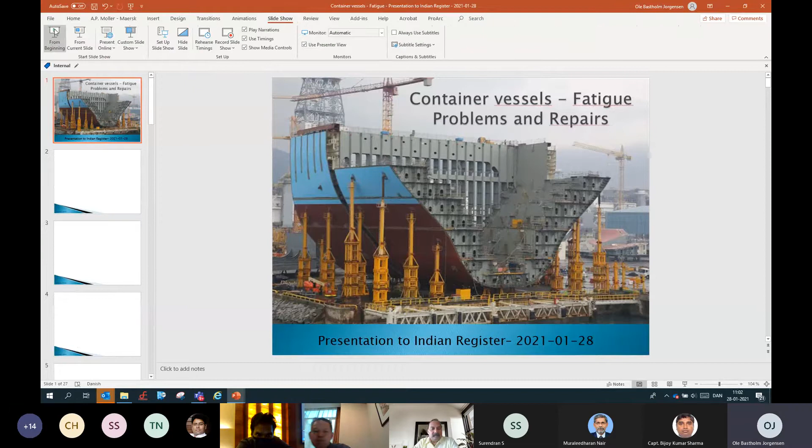I've given this presentation to Danish Naval Architect Society and also to Lloyd's Register some years ago. It was made on the request of Lloyd's Register in order to share the experience that we have had in Maersk with fatigue problems on container vessels through the years. I intend to have this presentation take around 45 minutes. I'm speaking in English, which is not my mother tongue, and I guess the majority of you are not also English as mother tongue. So please excuse if there's something you don't understand, then please interrupt if there's anything I should explain further.

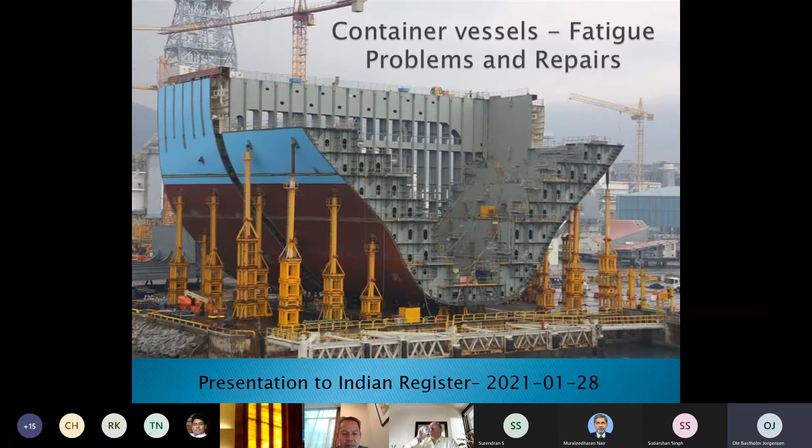My name is Ole Bastholm Jørgensen. I graduated as naval architect in 1991, so you can guess I'm not that young anymore. I had my first 5 years professional life at B&W Shipyard in the hull construction department, a shipyard based in Copenhagen. From 1996 through 1996, I had some temporary employments, amongst others, with Lloyd's Register. Then I joined Maersk Contractors in late 1996 and was there for 2 years working with FPSOs and drilling rigs. Then I joined Carl Marine, a Danish consultant house making designs for European owners building at Asian yards. Then I came back to Maersk in 2003, where I have been since then. The first 2 years I was in offshore, and since 2005 I have been with Maersk Fleet Technology, where I work with new building conversions, repairs, and emergency response.

It is the experience from the past 15 years that I have worked with ship repairs that I'm going to share here. These are practical examples that we face in our daily operation of our 300 owned container ships. It's an example of fatigue problems. We naturally also deal with other problems, but this presentation is focused on fatigue.

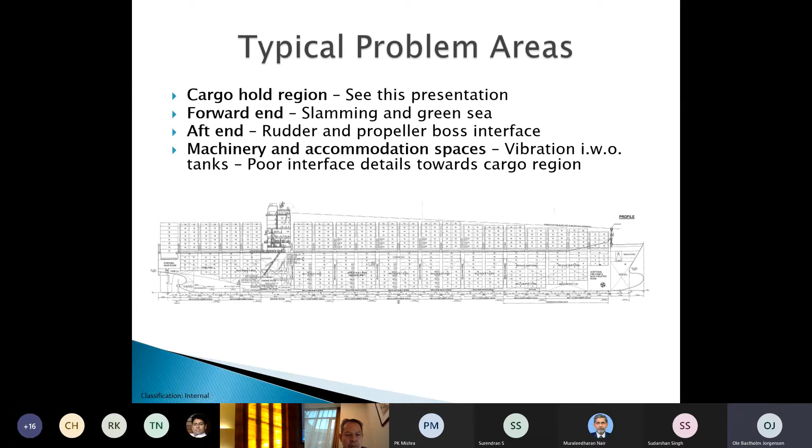One of the first examples is the termination of the longitudinal hatch coaming. The hatch coaming is a continuous member that goes all the way through the cargo hold region, sometimes interrupted in way of the accommodation, sometimes uninterrupted passing the accommodation. At the ends, as this is the outmost position of the hull girder, large stresses will occur in that area.

When you come to the end of the hull girder and taper it down, it's important that you taper it well. There are a lot of forces running in the hatch girder which have to migrate down into the deck structure. Although longitudinal stresses are not that high in the forward end, they are still considerable. When the forces come down and terminate here, you get a sharp corner. On a number of vessels from a specific yard we have seen a lot of cracks in this area.

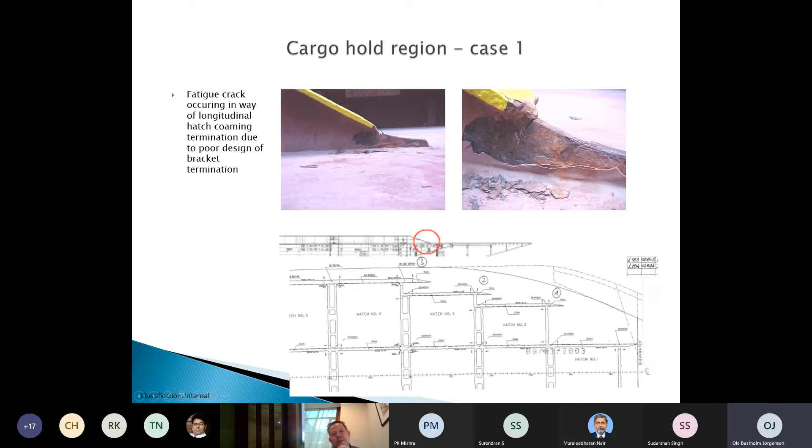The way we have dealt with it - and this is a repair we have done on 20 plus vessels - is that we taper down the top flange of the hatch girder. We crop the cracked nose here and taper this end well down. We weld this again, then smoothen it by grinding and taper it further down. This has solved the problem on these vessels.

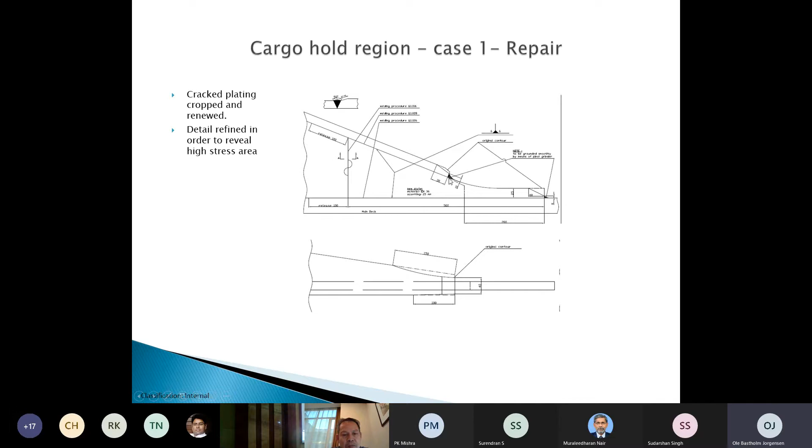Only one time have we seen the crack reoccurring, but it was mainly caused because there was a too abrupt closure of this top flange on the hatch coaming. That was example number one.

Another example we have seen on a series of vessels, more or less sister vessels - a series of 20 plus vessels. We have seen it specifically in cargo hold number 4, and it's important to emphasize it's only in one cargo hold. On the second deck stringer, not the upper deck but the first continuous stringer deck below it, we have seen cracks in way of the container shelf in this corner and this corner, both on starboard and port side, again on 20 plus vessels.

You can see here, this corner, turned around - you have the container shelf here, the cone to steer the container, and then the cell guide, which I have to emphasize is not welded here - it stops around 50 millimeters above the landing pad. You can see the crack developing like this.

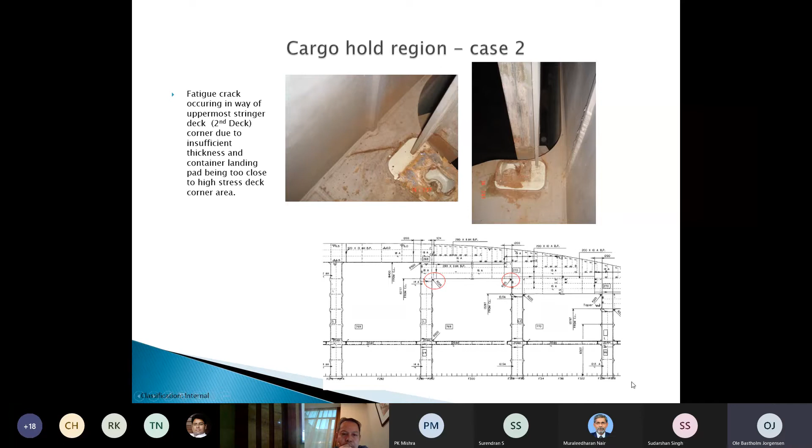We have seen that again across this vessel series, and the repair has been quite complicated. The repair has been to crop the crack, remove the doubler, crop the welding and the cracked plating, then add an insert of higher thickness and higher grade to reinforce the area. We also changed the shape of the landing pad so that the fillet weld of this doubler moves away from the high stress area in way of the deck corner.

Here you can see the contour of the original landing pad, and here the contour of the new landing pad. The new landing pad is just as efficient as the old one, but the fillet weld is moved away from the high stress area, and this has solved the problem. The first repairs of this we did back in 2006, and we have not seen any reoccurrences.

We have to conclude it was a poor detail design, where the thickness should have been increased in that particular area. As you can see, if you have a transverse bulkhead here and a longitudinal bulkhead in front of it, in order to make this insert you have to cut holes here and make slits here.

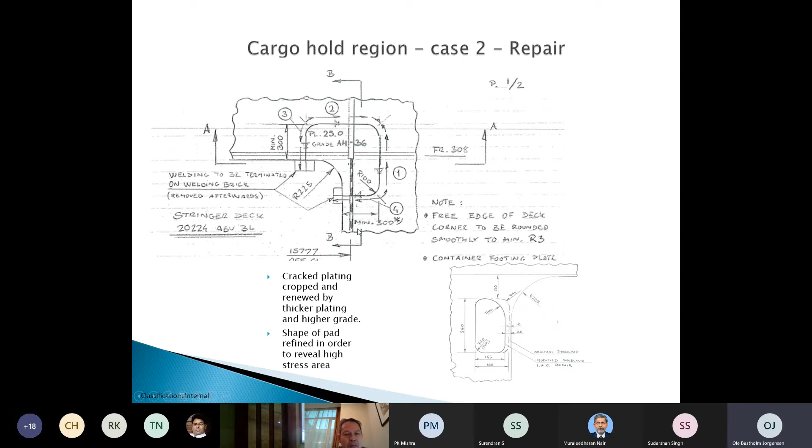Here you can see an example of the repair. Here you still have the landing pad in place. You cut a hole, you make a slit, you remove the cracked plating, and you apply an insert.

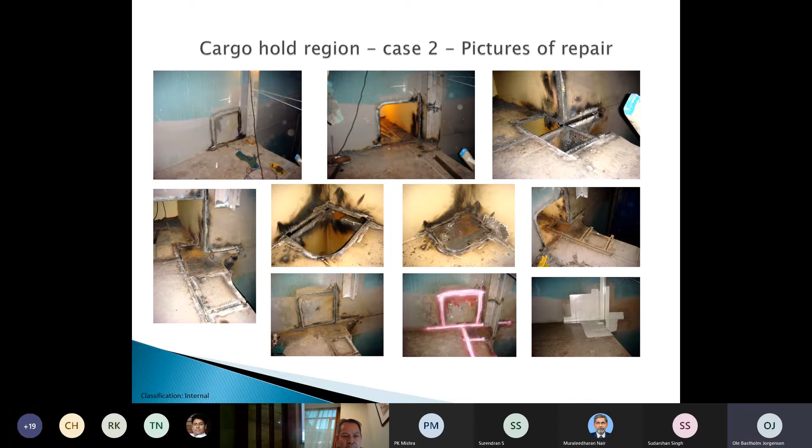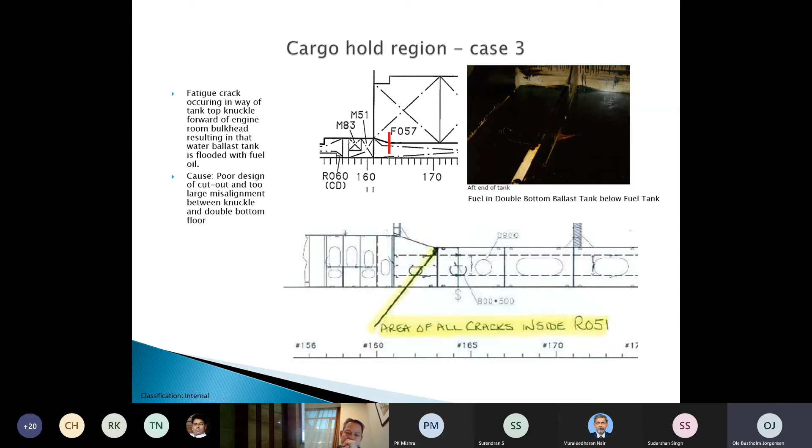This happened only two years after the vessel was delivered from the yard. It was a brand new vessel, more or less. Therefore we initiated a root cause investigation with the yard and with Lloyd's Register, which was the classification society, and concluded that the root cause was this misalignment between the knuckle here. You can see the tapering of the tank top here. This is a side view, and then the horizontal tank top plating.

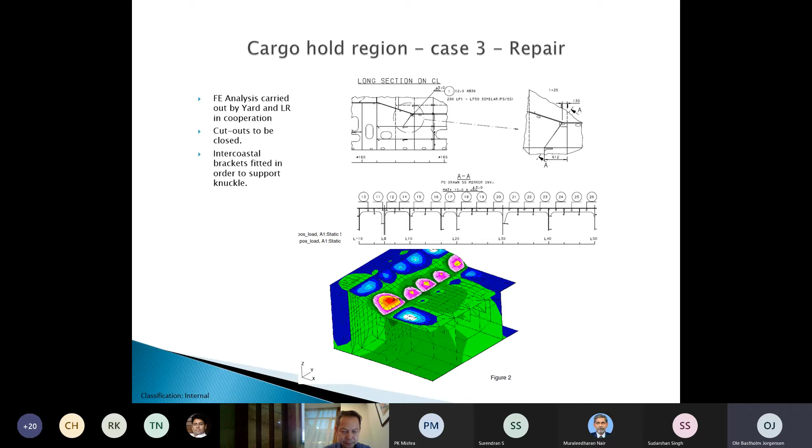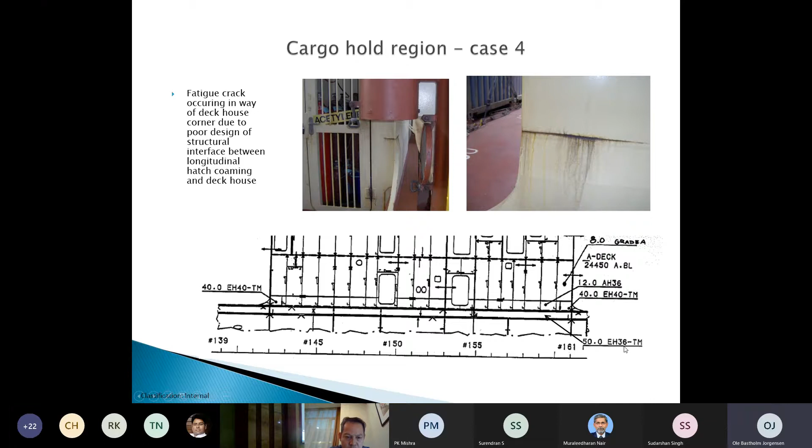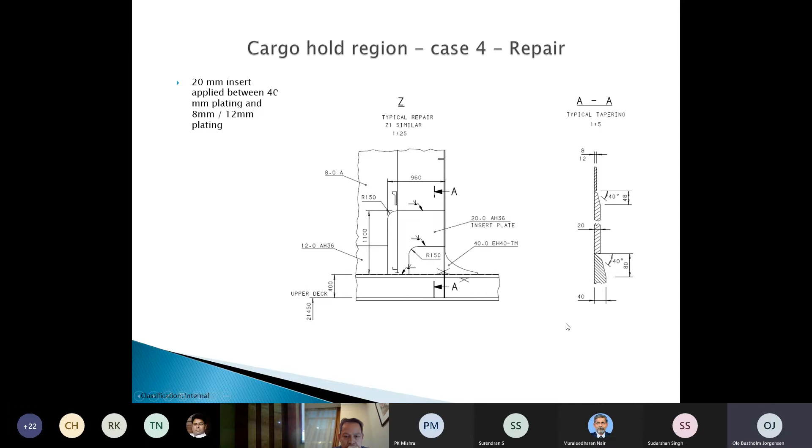That was also the philosophy adapted dealing with this problem, as we inserted a 20mm piece around the 40mm piece so that this met the 8mm. Of course, 8 is still less than half the thickness of 20mm, but it's far better than the original solution, and this larger insert was able to distribute the forces well from the 40mm plate meeting the hatch coaming. Again, we have not seen any problems reoccurring in this area, fortunately.

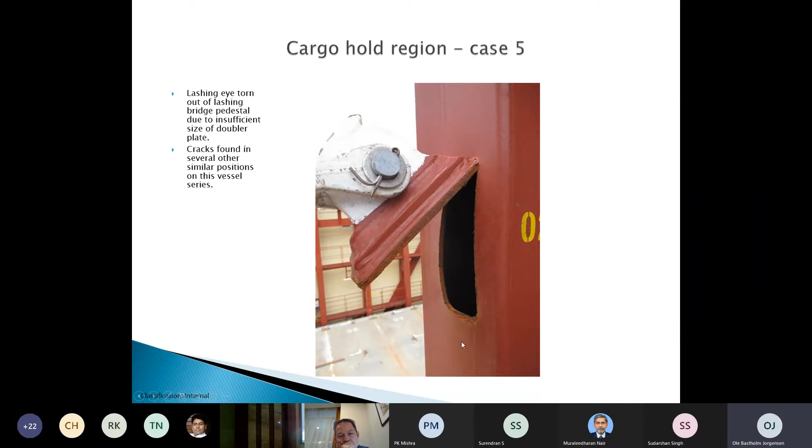We went back to class that had approved this, and to the yard that had designed this, saying this is a poor design—what can we do about it? They made some load tests at the yard, making a model of this, confirming that this was a weak design.

You had a very thin doubler meeting this wall, and because of stress concentrations here, when forces were pulling in that direction, there was a weak spot with a very thin wall, and then it was torn out. In order not to cut off all the pad eyes and reinstall them again, we developed a repair procedure where we added a doubler.

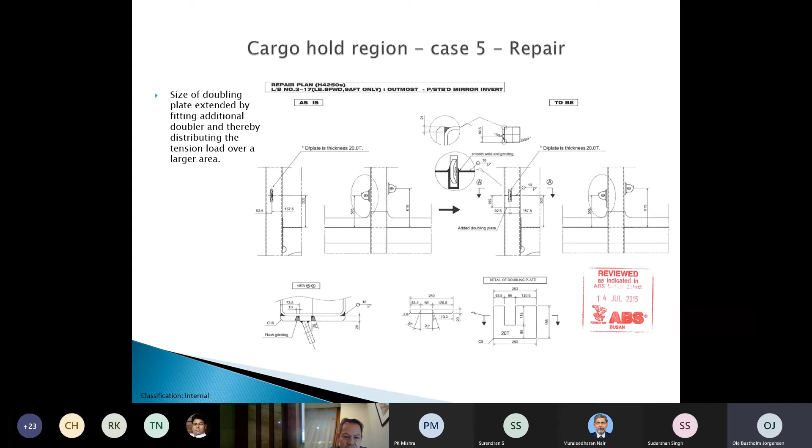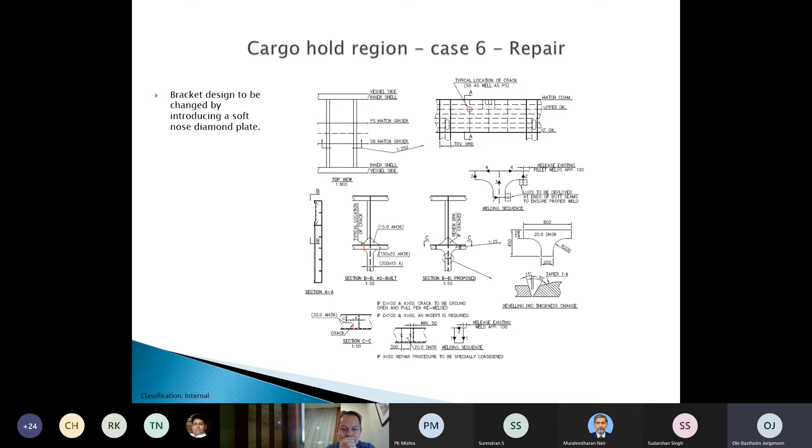A side note, stepping back to the first example I showed around the fatigue problems that we had in the corners of hatch of cargo hold number 4. We had a long discussion with ABS, where these vessels are classed, saying that they should do a better finite element calculation in order to reveal how long fatigue life you actually have here, because that was not analyzed during design.

They concluded that we would get problems here. It only had a fatigue life of around 5 to 7 years. But they claimed that the problem was much higher in cargo hold number 3. We have seen a lot of cracks in cargo hold number 4, and we have never seen cracks in cargo hold number 3. That also tells you that fatigue calculations you can do, but they are built on a lot of assumptions, and therefore sometimes there is large uncertainty in these calculations, because the result depends on the assumptions made.

And sometimes designers and class can make mistakes. But that's how we human beings become wiser and wiser, we have to learn from our mistakes. I'm not pointing fingers at the yard, I'm not pointing fingers at the class. It's only that with the large structures we deal with, sometimes small mistakes are made that can lead to very costly repairs. And then we have to deal with them the best way possible.

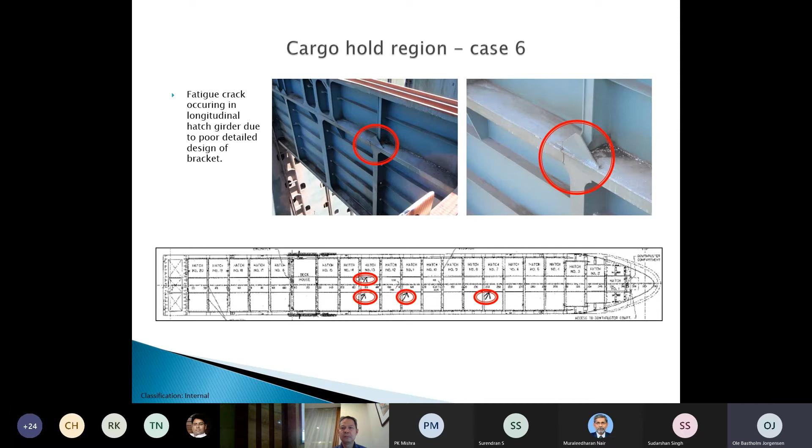Okay, example number 7. Here we are on the transverse stringer decks in the cargo hold region. And these stringer decks, in order to get access to the cargo holds, you have staircases to go down to the tank top. These staircase holes, the thickness of such plating is typically around 10 millimeters.

And these staircase holes are rounded in the corners in order to avoid stress concentrations. But the corner radius is kept quite small in order to minimize the size of the hole and provide good access to the staircase. And on some vessels, we are seeing cracks in these areas.

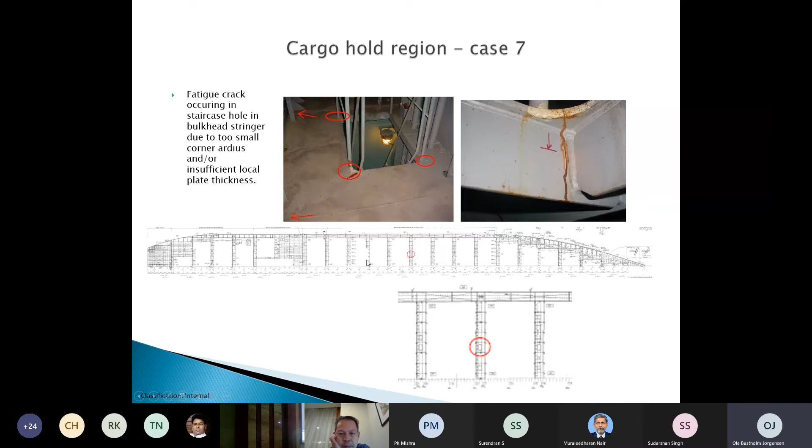We have dealt with them two ways. One way was to crop and renew the plating and insert a thicker plate and then increase the radius of the corner. That was a very expensive solution, and therefore I got some complaints from my colleagues in our fleet groups.

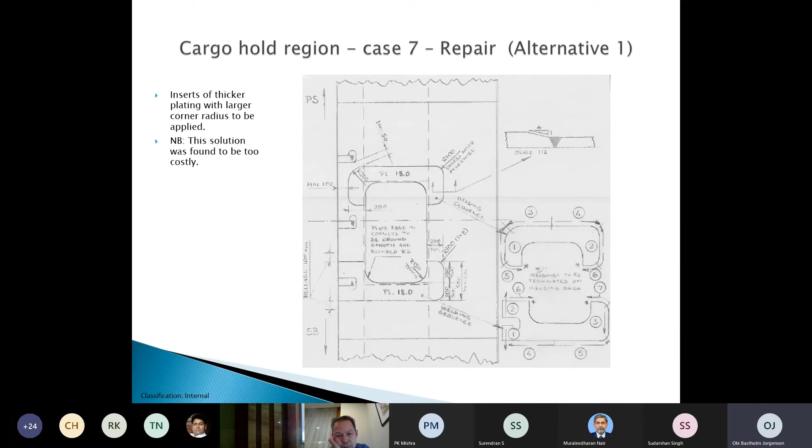They said, can't you find out a cheaper way to do this repair? We need to do the repair, but if you are going to do it in operation, this is a very expensive repair. So we discussed it backwards and forwards.

And then we did it so that instead we welded the cracked plating and inserted a ring, a flat bar ring, around the staircase hole like this. Here you can see the flat bar ring. Here you see the stiffener underneath the deck, which is indicated by the stippled line here.

And here you can see the flat bar with only 20 millimeters below deck so that you can weld here, and then with a height above the deck. Of course, where you go down the staircase, you cannot have a step like that, so here we have tapered it down like this.

I have not heard that we have seen problems after this repair. Sometimes it's not that much that shall be done in order to reinforce, and then you solve the problem permanently, because you go from 10-year fatigue life to 50-year fatigue life, since you improve the strength considerably.

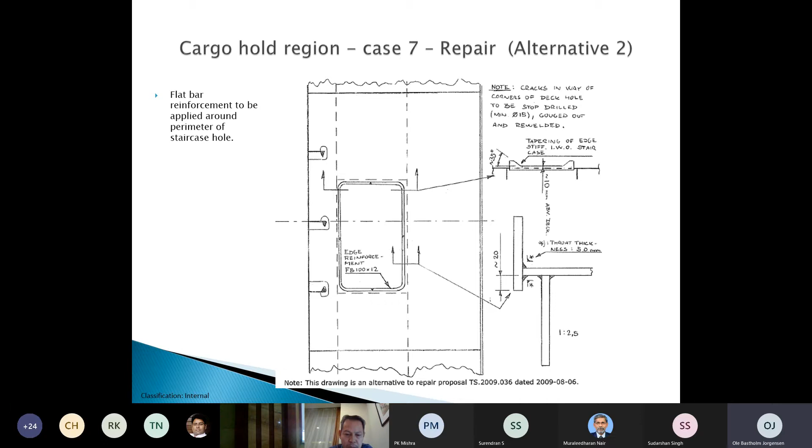Again, also here, an older container vessel with a design solution that you would not see in modern container vessels. This vessel was built in the 90s in Japan. Here you can see again a stringer deck platform in the cargo hold. You can see the rounded corner. It is a little the same as the first example, the same area.

Sorry, there's a big echo right now, so someone has turned something on, so I cannot hear what I'm saying.

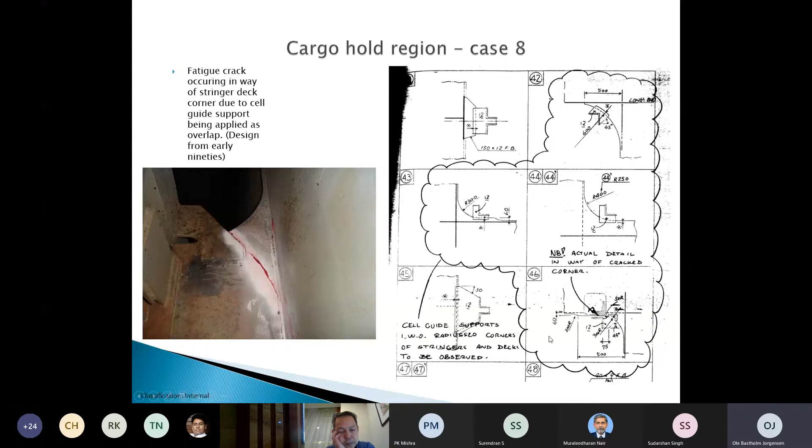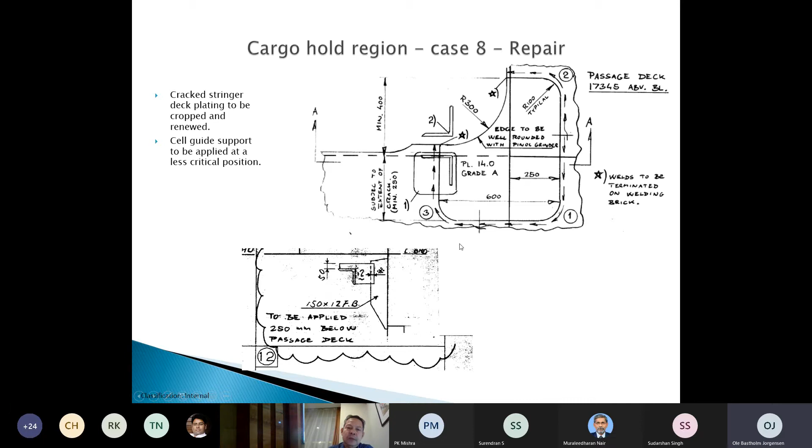And this 90-degree, very sharp corner totally ruins the intention to smoothen this area, because now you get a very large stress concentration here. And needless to say, we got a crack here. The repair was cropping and renewal of the plating, and then making a cell guide support underneath the stringer deck, so that the support of the cell guide was independent of the stringer deck. That solved the problem.

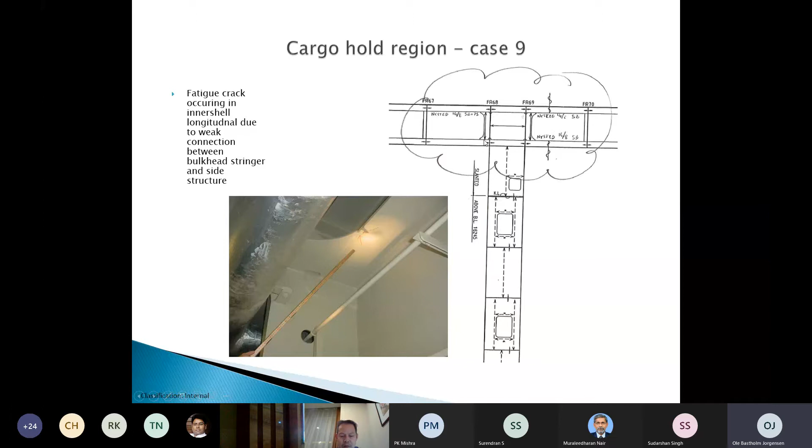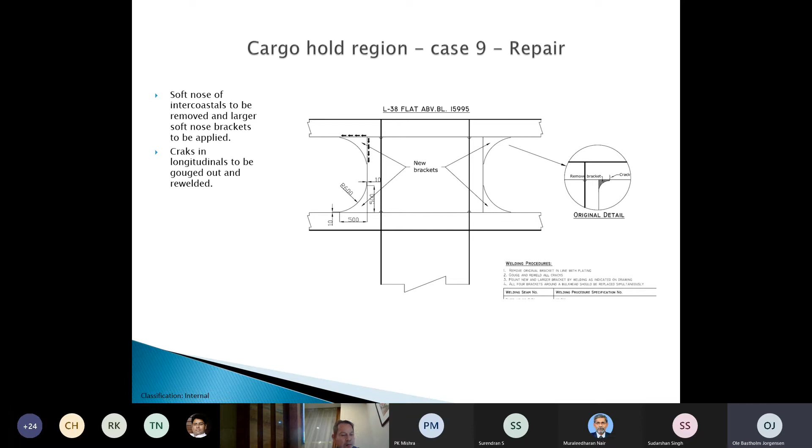We solved it by cutting off the nose of the bracket here on both sides, and then applying a new larger bracket with a larger radius and a very small nose here. That again solved the problem, because you smoothened the stress concentration by increasing the radius.

The last story I've added since I did the presentation to Lloyd's Register - I actually added it this morning. It is a case we have had on 4 different container vessel designs built at the same yard, of different sizes, with a number of sister vessels in each vessel series. It's 4 different designs, but they all have the same layout.

Here you have the aft deck, here the accommodation block, and then the engine room underneath the accommodation block, also positioned underneath the bay aft of the accommodation block. In order to maximize your intake, you avoided having a hatch here - all containers stand on deck. But to get an extra tier of containers, you made a sunken deck at this position, so at this sunken deck you actually have up to 9 tiers of containers standing.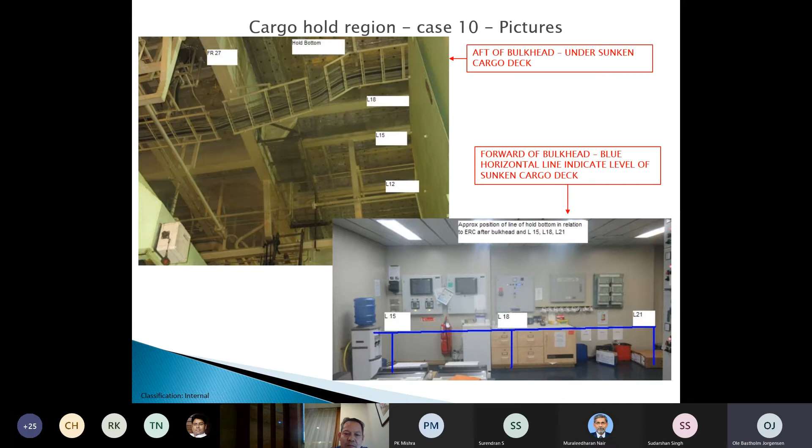And we went back to class. A part of these sister vessels were classed with Lloyd's Register, and a part were classed with ABS. Together with the yard, who was very engaged in solving the problem, they made a reinforcement proposal, and then we adopted the reinforcement endorsed by Lloyd's Register, because it was more massive than ABS's. Not saying that the ABS's did not have sufficient strength.

If you give two persons a task, they solve it in a different way. But to be on the safe side, because this was a very expensive reinforcement that we had to do, we chose the most robust solution, being the Lloyd's Register in this case.

As you can see here, these brackets were reinforced by other thicker brackets and intercostal brackets in this area. We also had to do some reinforcement where the girders met the bulkhead. I've not included details of this here, but there was a lot of patchwork with thicker inserts that had to be carried out, and this could only be done during docking.

It is because we are still doing these types of repairs. It is a quite expensive repair to do. Again, this is an example of, if you have had the eye on the right spot when you designed it, you could have avoided the problem. I'm not saying that the yard made a poor design and class neglected a potential problem, but sometimes there are some things in a ship design that you don't see, and then you have to solve the problem.

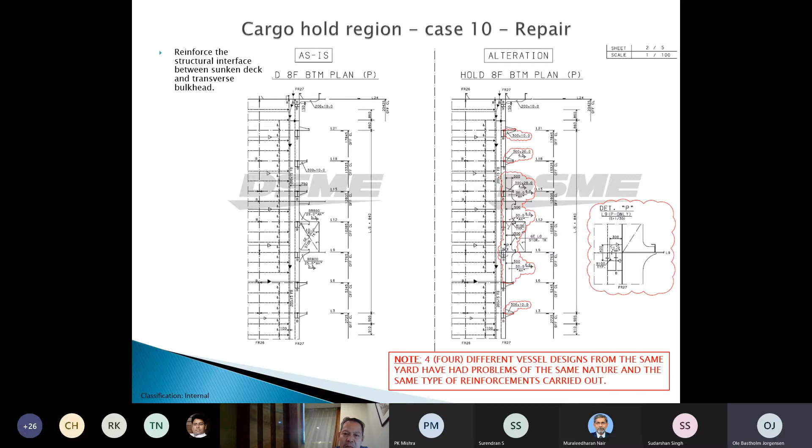I could dig out a few other examples, but I'm happy to say that these cover the most typical fatigue problems that we have seen through my career in the department where I've been sitting the past 15 years. And then I show you a nice picture of a nicely painted bracket where they did not manage to crop and renew the corroded bracket. But it's nice paintwork.

Then I'm open for questions. Again, thank you for taking the time to listen to my humble experience.

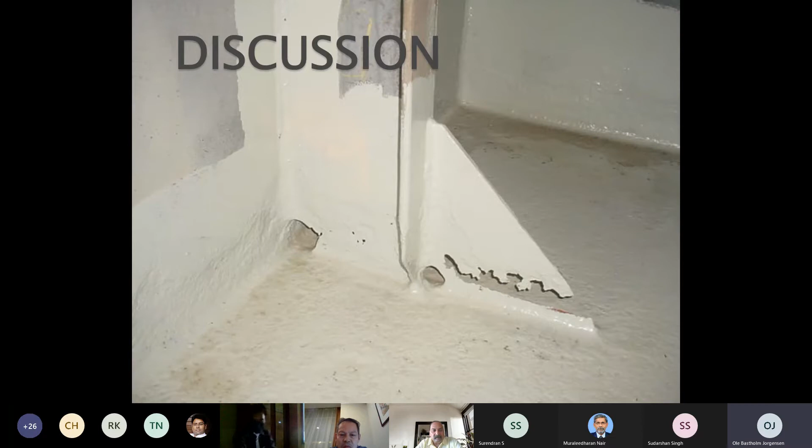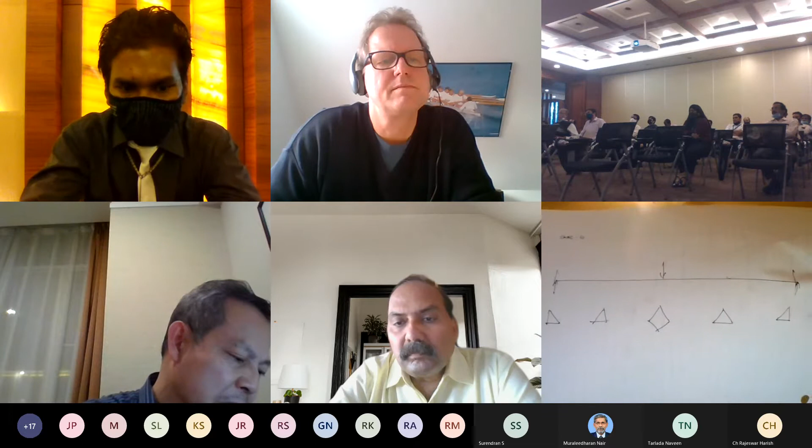Yes. I believe instead of keeping it as a localized thing, we should keep all the diamond plates towards the center, where we always think that the load is a uniformly distributed load, but actually the load is never uniform. So we should keep all the diamond plates in the center, the triangular plates or something like equilateral triangular pad plates in the middle, and the right angle triangles at the ends. I guess this should be a pattern we should follow, where there is more mass in the center. This will add stiffness to the system. Arvind, if you can show the paper again.

Again, I'm not sure if I understand the comment correctly, but we made this reinforcement here - a triangular diamond plate. It was not possible to make a square, 4-edge diamond plate, because the member coming from above was not at the same level as the other, so the repair would have been more cumbersome. But I think the central point is that diamond plates are good when you have members crossing each other, instead of a bracket that meets a flange with a nose on it.

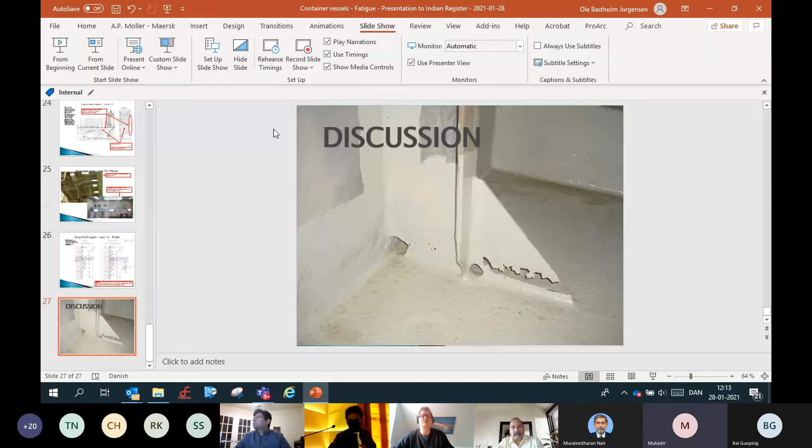I would like to see if I can share my screen again. Yes, I think it's better you show it since it's a big one. How is it going now with that? Can you see it? We can see your screen. Okay, then I will go down to the example here. Just a moment, it was too long.

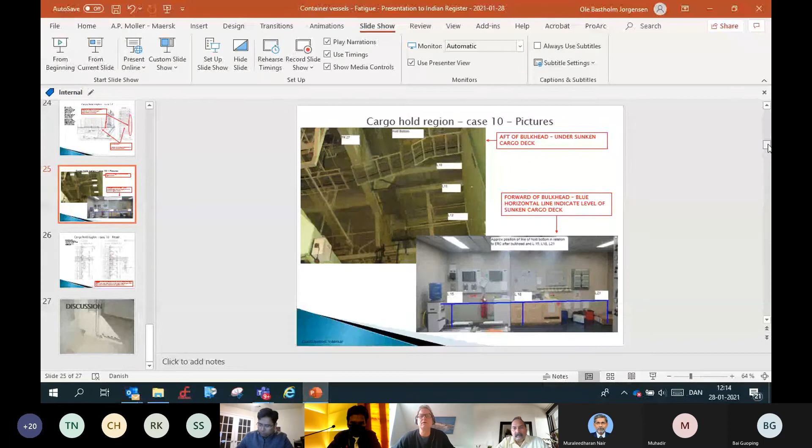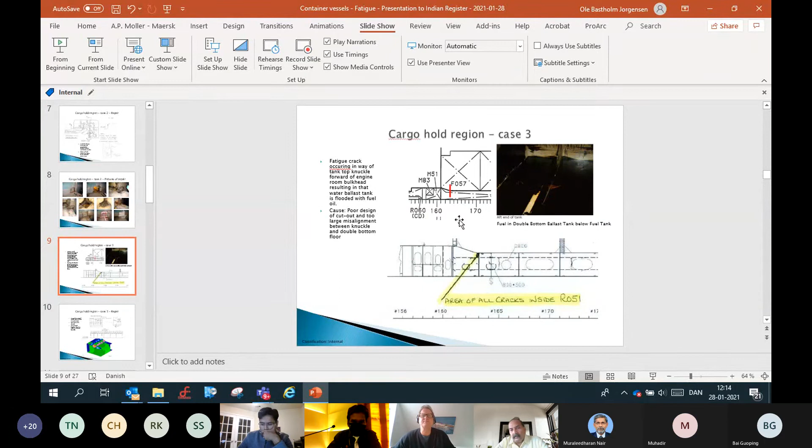Yes, it's case number 3. The problem was that you had this knuckle, which if I zoom in - sorry gentlemen, no problem - you have this knuckle here, and if I remember correctly it was 35 millimeters from the butt weld to the floor, and then there was no supporting member at this area, and you had a cutout.

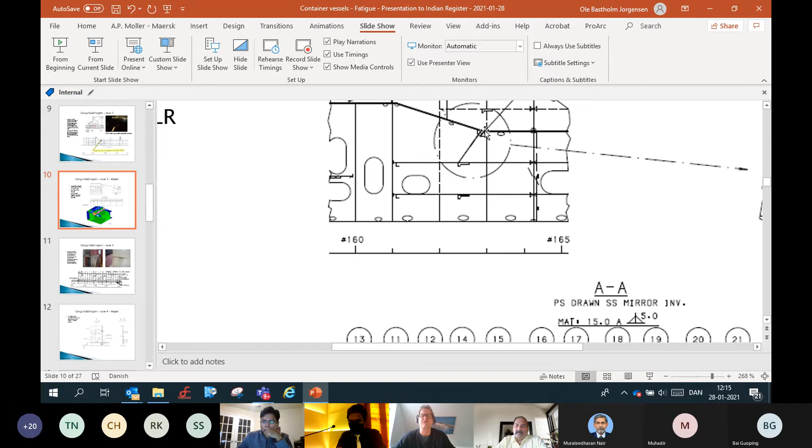This butt weld was quite unsupported, and when you got compression forces, the forces have to go around this corner and then through this corner. When the forces run through a knuckle, there is a component also going out of plane here, and that causes some micro deflections in this area. Therefore we had to close this plate to make support at the crossing, and also close the cutout to make support at the crossing, and then add a bracket here meeting the knuckle, so that you got a very, very stiff butt weld connection here. And that solved the problem.

But this vessel was very deeply analyzed and had all kinds of fatigue notations from Lloyd's Register. But you can put all kinds of fatigue notations and make many calculations - if you don't look at the right area, you will not discover it. Having these fatigue notations does not take away the designer's responsibility to make good, sound design solutions. Having a gap of 35 millimeters between the knuckle and this floor is not to be considered a good solution, at least not in this case. It proved to be a weak solution because you had cracks on a number of sister vessels within the first 2 years after delivery. But the fatigue analysis did not catch this because it focused on other details in the cargo region.

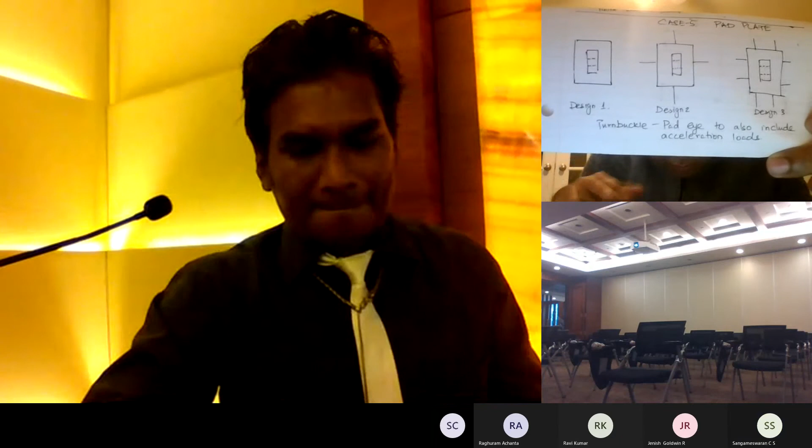The pad plate design - I believe the other pad plates we can leave as a primitive design, but where container lashings are used, or for a container securing arrangement, we need to distribute all the loads just outside of this square pad plate. We might need webs, like the main engine chocks, where we have webs on both sides, or maybe all 4 sides, where we put resin and web kind of chocks at the base. For containers there are a lot of loads because of acceleration, rolling and other dynamic forces. There's also a constant force where the turnbuckles are continuously kept tight - it's like a flat constant load plus a sinusoidal wave on top of it, so the load is higher and fluctuating, which will accelerate fatigue failure.

So for the container pad plates, where the turnbuckles are going to be fastened, I guess we need to reinvent the wheel - reshape the pads.

There was a question from Plan Approval about whether they are doing it on the new vessel or not. Fortunately, in an Indian yard I can just change my design without telling anybody, but at Hyundai, if I want a design change, it's a big process and they will not accept it easily. I've seen a pipeline going through a door - the pipeline guy and the door guy weren't coordinating, so he just opened the door and let the pipeline through. So Korean yards are much more disciplined than us, but sometimes they lack flexibility.